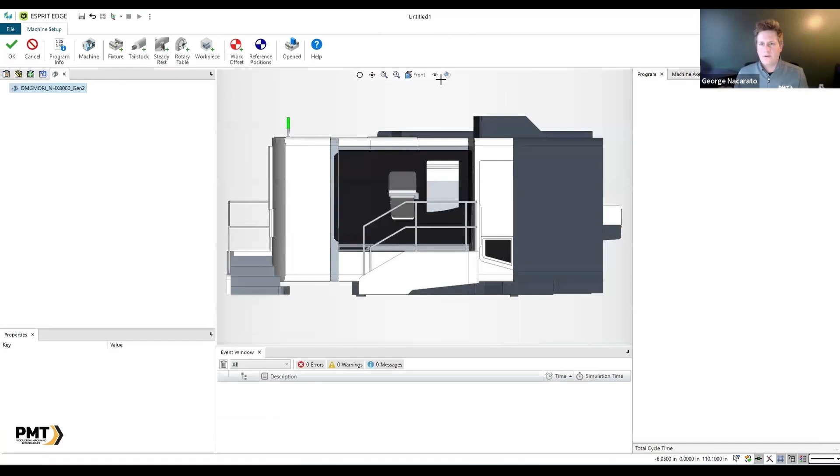From there, like always, we want to load our machine. So we're going to go load our machine. We're going to use the DMG NHX 8000 Gen 2 with the HSK 100 spindle. Very large, fun machine to set up. So we're going to hit OK.

And the first thing I like to do is just turn off the machine, so you can kind of see the spindle head and the table. And if you'd like, you can obviously adjust. If you want to see through, you can just set the transparency to different levels. So I just like to turn it off for right now.

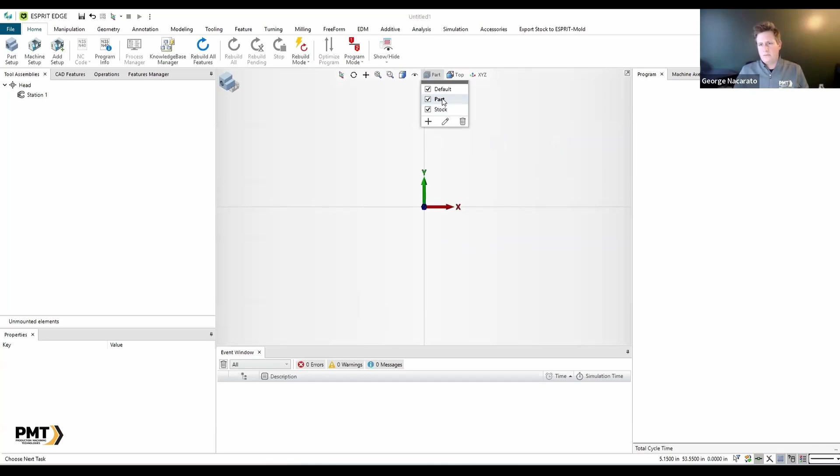Next thing, let's build some layers and load in our part and stock and start to get an idea of what we're programming today. So I'll start with creating a part layer and a stock layer. Double click my part layer to activate it. I'm going to go to File, Import, and I'm going to go to my folder set where I've got a cylinder head we're going to program today.

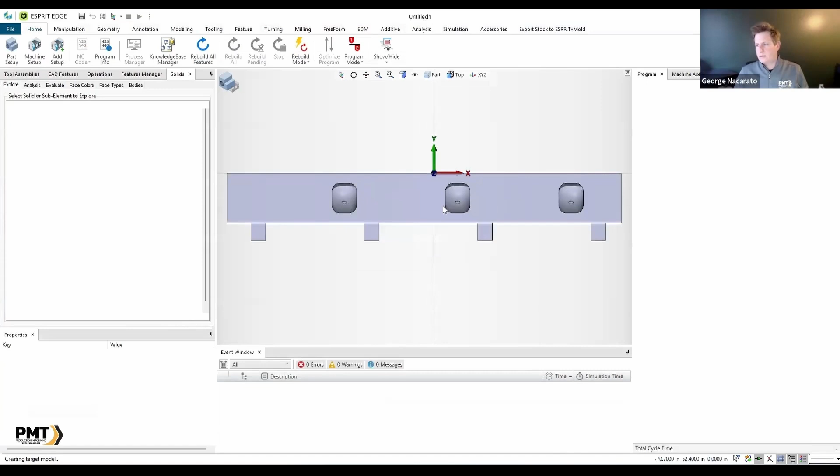So import as new part is checked. So when I click open, it's going to ask me if I want to do CAD diagnostics on this file. I click yes. The part is already defaulted as a new part as well. So next I'll activate my stock layer, go to File, Import, and this time I will import in the stock casting for the cylinder head. Uncheck import as new part.

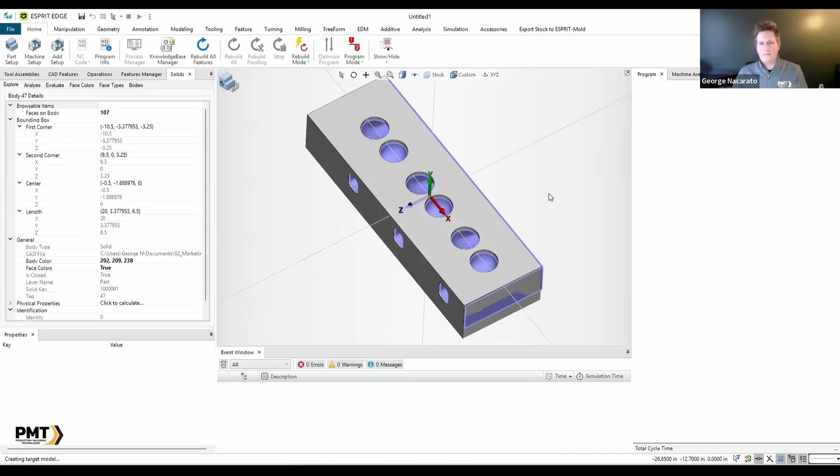All right, so now we've got our stock and our part. All right, so we're going to go over here to part setup, and our part is already defaulted, right? Because when we opened it, we said import as new part. We're going to say our stock is a solid, and we're going to choose that solid.

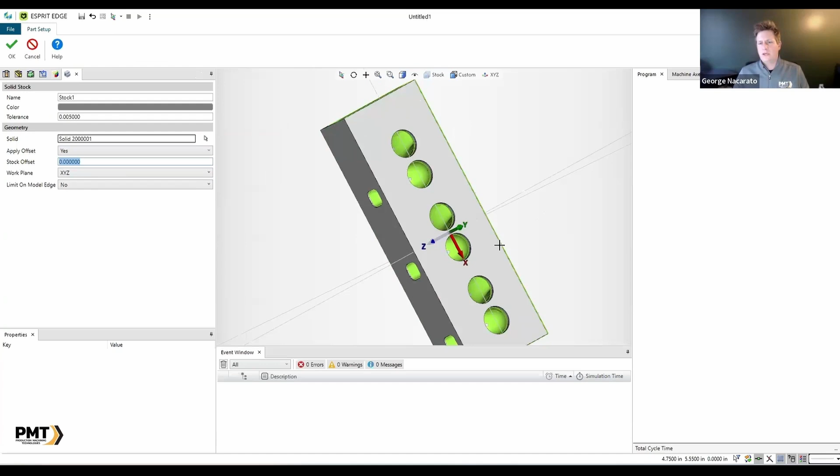If you wanted to, you could apply an offset and put a stock amount on all the walls. That's not something we're going to do with this file. Yeah, let's see what's going on. It says there's an issue with it. There it goes, fixed it for me, right? So I hit OK. So now my stock and part are set up, and I can turn off my stock and go on from there.

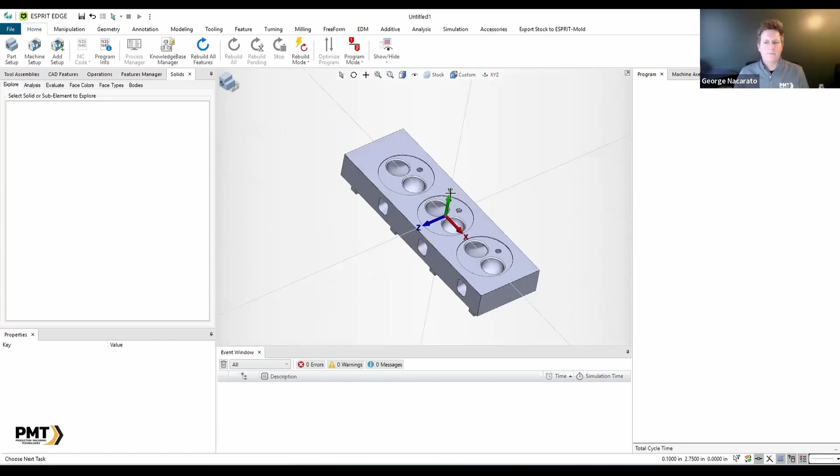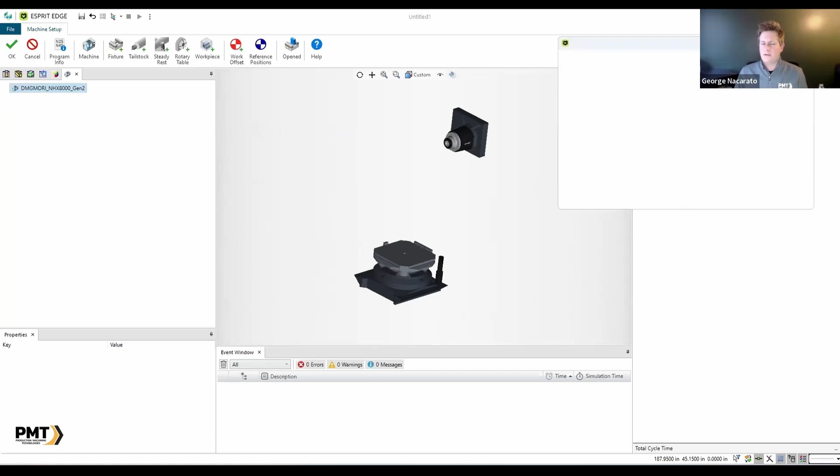Next, we need to go into our machine setup and build our machine setup. All right, so to do that, we would usually need to have fixtures. And if you already have fixtures on your floor, you might not have them built yet in Esprit Edge. So I'm going to come up here to the NEXUS button. And once I click that, it's going to open the NEXUS platform for me.

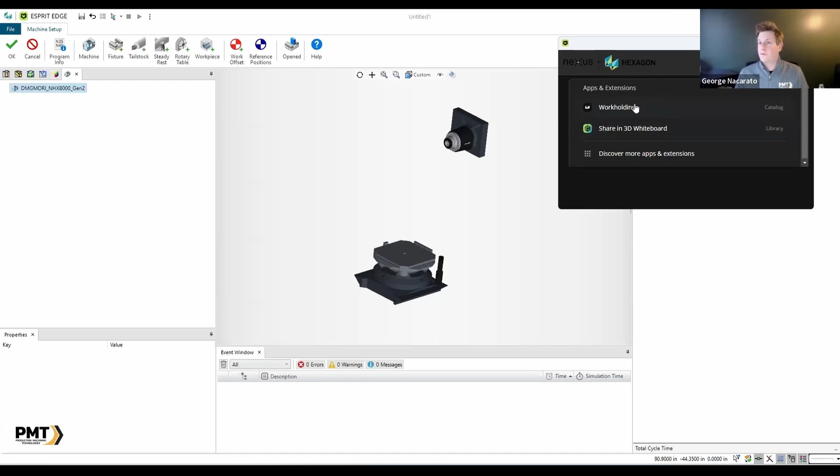And for right now, you have Workholding and 3D Whiteboard. Think of 3D Whiteboard as a cloud-based sharing system where you and other coworkers or people that need to approve your programs or files can review them in here. This is cloud-based, and thus your material would be held on the cloud if you start using that. Workholding is what we're going to be focused on, so we're just going to show you some examples.

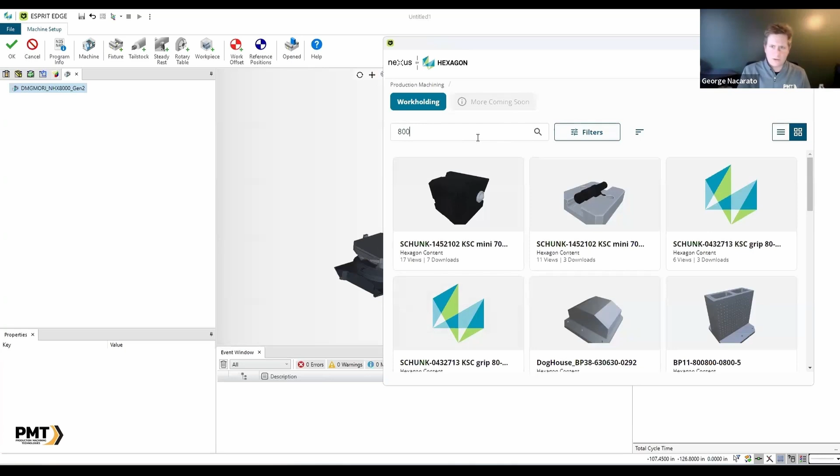Inside the Workholding, you'll open it up and the content catalog will show up. You can filter and search. I can filter by types and by brand. I know that the table on my machine is 800 by 800 millimeter, so I'm just going to type in 800, see what I get. I have some options for tombstones right here. I'm going to select this tombstone.

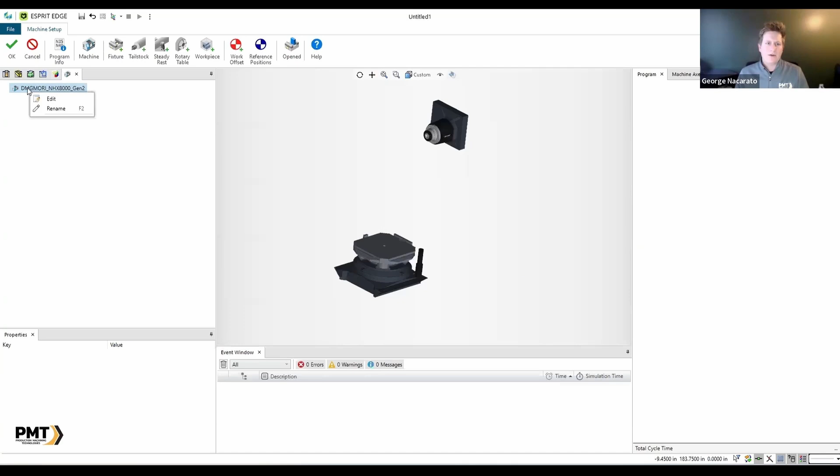I can just click the checkbox here and add it to a content list I want to download later, or I can just click this box right here. So I'm going to click that, and it's going to download the file for me. Right, so I can come back over here and click fixture, and in my downloads folder will be that setup. There we go, easy enough.

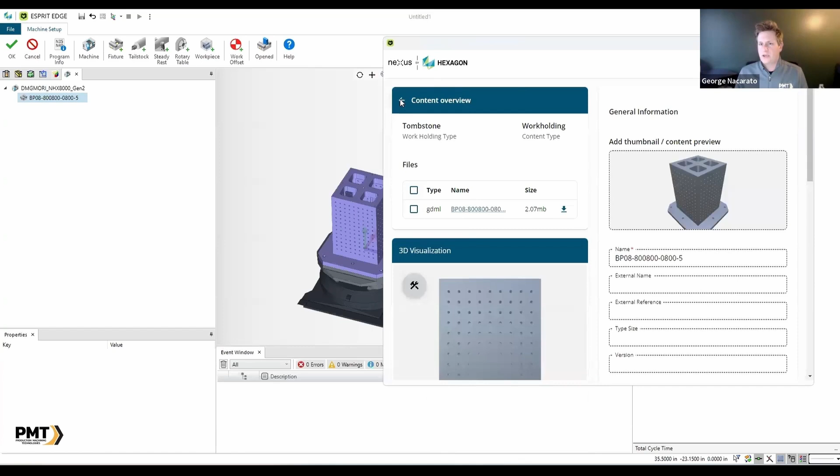Next, I need to add an actual vise fixture to hold on to my part and stock. So with this tombstone selected, I go back to fixture, but I don't have a fixture downloaded yet. So I can come back up to the Nexus platform and search again. Say, what am I looking for this time?

Let's see if I just look up vise. All right, it's going to show me some vise options. There are tons of options, right? I can also filter by brands. I'll search, maybe I want a Jergens, right?